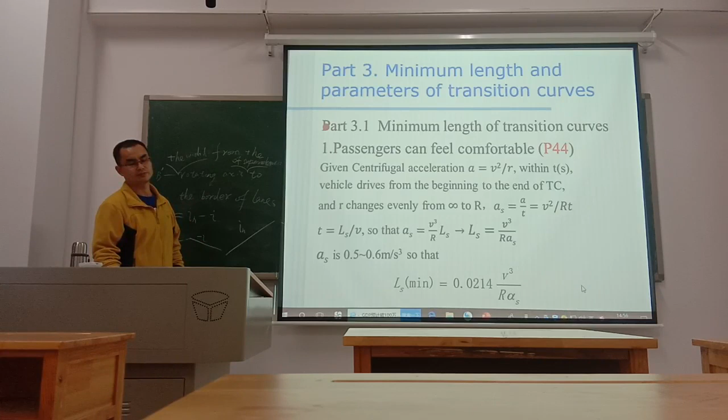In the Chinese standard, the minimum length of transition curves for highway and urban road. This is a table for highway, including freeway, and that is different from America, Europe, or Africa.

The design speed is 120 or 100. When the design speed is 120 kilometers per hour, the road is freeway.

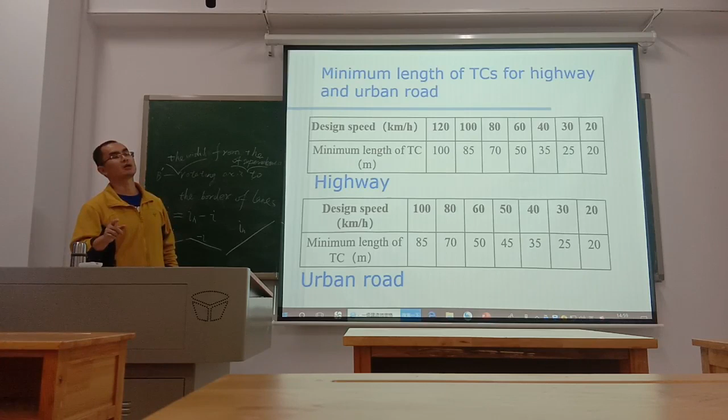On the urban road, there is a minimum length of transition curve corresponding to every design speed on urban road or on highway. The larger the design speed, the larger the minimum length of transition curve.

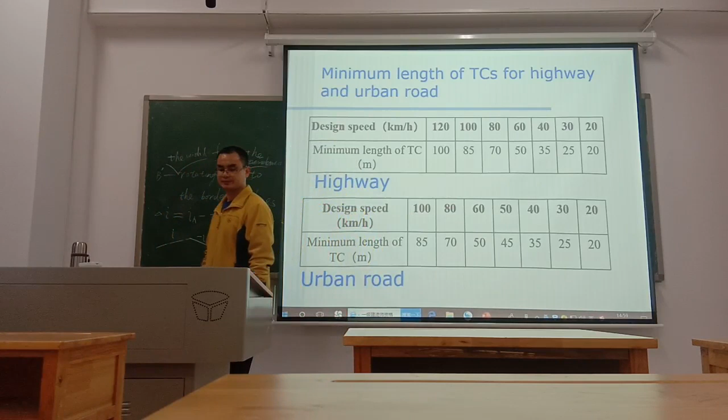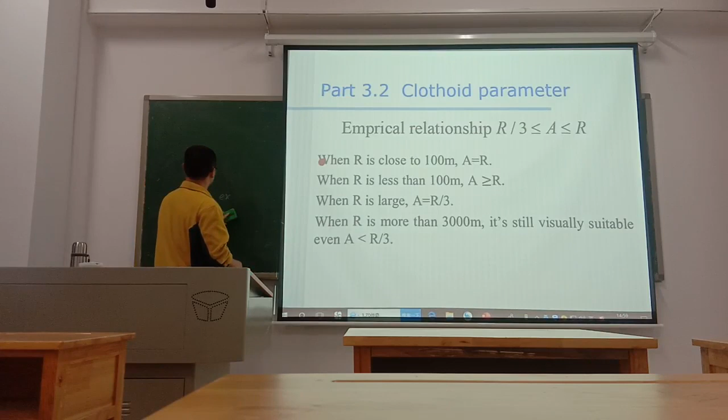What's the clothoid parameter? L times R equal to the square of A. A is clothoid parameter.

Empirical relationship is: A is greater than or equal to radius divided by 3, and less than or equal to radius. This is the empirical relationship.

When R is close to 100 meters, A is equal to R. When R is less than 100 meters, A is greater than or equal to R. When R is very large, A is equal to R divided by 3. When R is more than 3000 meters, it's still visually suitable, even if A is less than radius divided by 3.

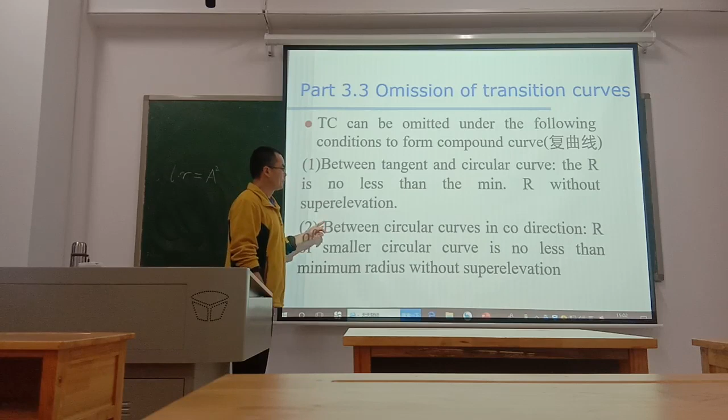2. Between circular curves in the same direction, turn left or turn right, the R of smaller circular curve is no less than minimum radius without superelevation. 3. The smaller r value is larger than the minimum r.

The last page. What's the minimum of R with superelevation? The standard has the table of minimum R with superelevation.

In this book, page... We have the book actually.

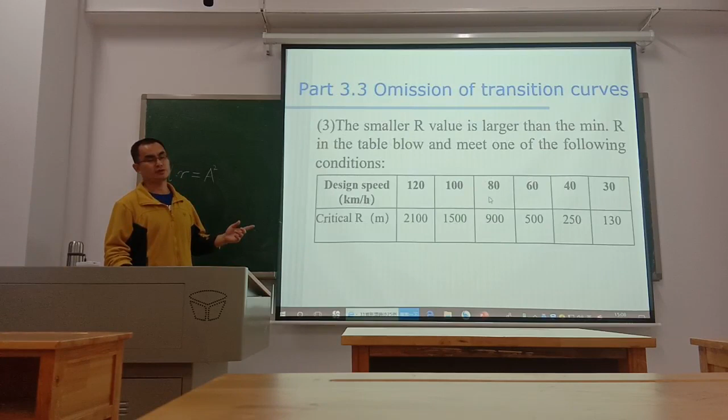And with one of the following, must meet one of the following conditions. What are the conditions? These are the three conditions. One is okay, one, two, three. If the condition meets one of the three, you can omit this table, you can omit the transition curve. Transition curve is not necessary. You can delete it.

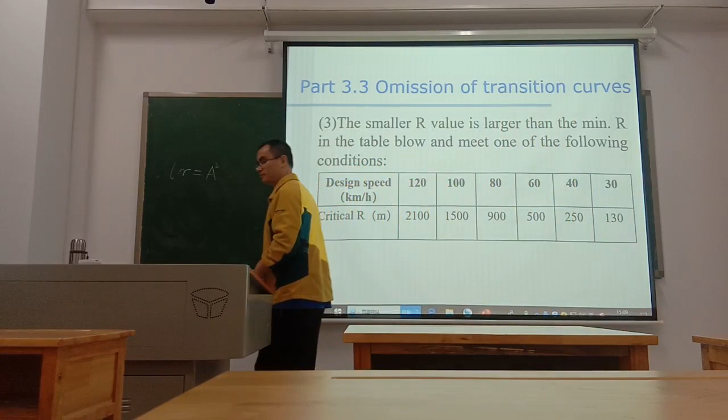If the radius is this value, if we find this value, we will not put a transition, we will omit the transition. It's greater than, it's greater, we can omit the transition curve. If it's less than this value, we must use transition curve.

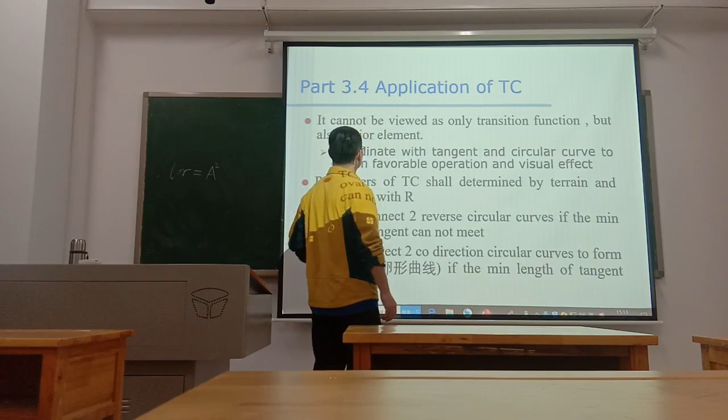The parameters of the transition curve shall be determined by terrain and coordinate with R. Transition curve can connect two reverse circular curves if the minimum length of tangent cannot meet. Transition curve can connect two co-direction circular curves to form an oval, egg shape, oval curve, if the minimum length of tangent cannot meet.

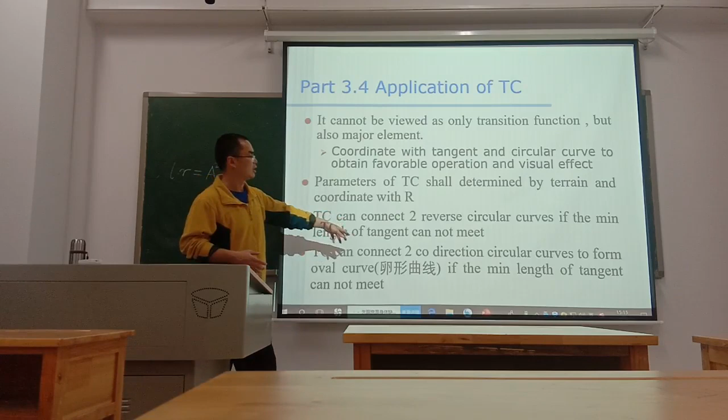What's the meaning of the minimum length of tangent cannot meet? It's too short. The tangent, or the straight line, the length of the straight line is too short. We can connect these curves with one transition curve, clothoid or one transition curve. This is the same meaning.

Transition curve with transition curve. L is the length of the total transition curves, including circular curve and two transition curves. Ls is the length of the transition curves. L is the length of circular curve. R is the radius of circular curve. Alpha is the central angle.

This formula is for the calculation of horizontal curves. Q is the increment of tangent. P is inner shift value. Beta 0 is the angle of transition curve.

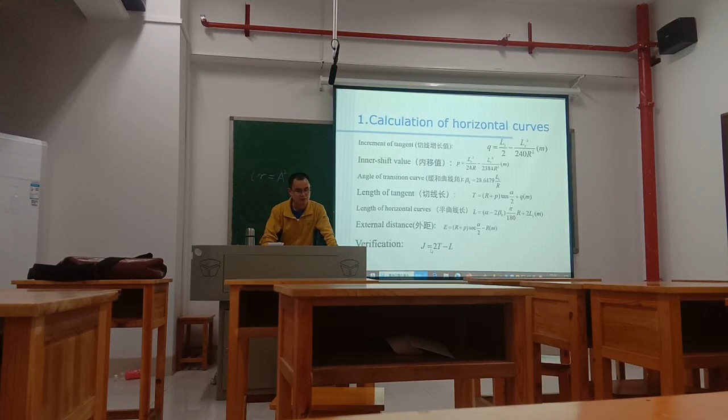Beta 0 is the angle of transition curve—this is beta 0 and this is beta 0, because this transition curve is the same as this transition curve. T is length of tangent. L is length of horizontal curves. E is external distance. Verification: J equals 2 times T minus L.

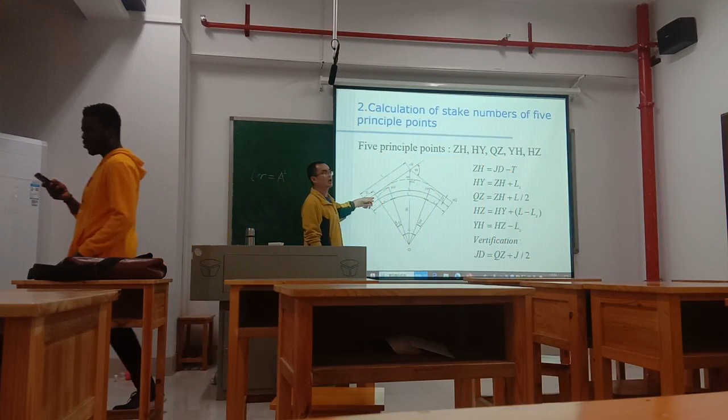We can get 5 principal points, the stations of the 5 principal points. The 5 principal points include, contain, ZH—this point is the joint, the point between the joint between straight line and a transition curve.

HY is the joint, the point of the transition curve and circular curve. YH is the joint between circular curve and transition curve. HZ is the joint between transition curve and straight line. QZ is the middle point of circular curve. So we can get the distance of these two points—this is the calculation formula.

Calculation of stake numbers of 5 principal points.

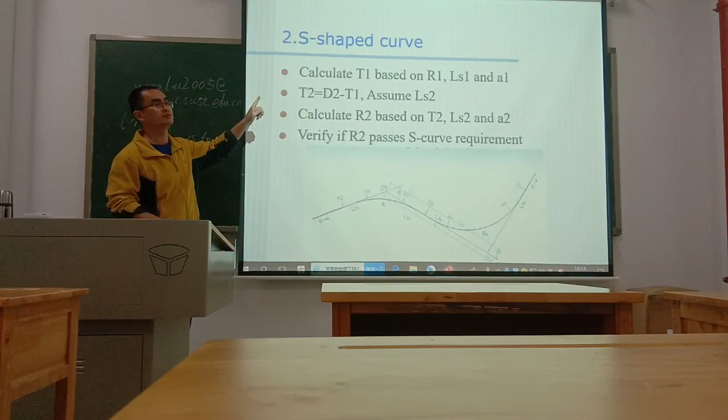3. Oval curve. You can study this method according to this picture. How to calculate this S-shaped curve? Oval curve. Oval curve is the one that connects 2 circular curves by closed soil.

Circular curve 1, clothoid, circular curve 2. This circular curve has the same turning direction as circular curve 2, and the radius R1 is different from R2, R1 is not equal to R2. This is circular curve 1, circular curve 2, and this is clothoid. So this is called oval curve.

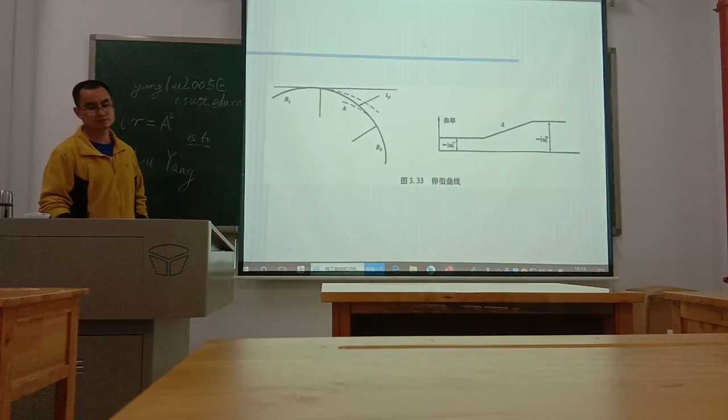Oval curve is often used on ramps for interchanges. Circular curve 1, circular curve 2.

Clothoid parameter A in oval curve should satisfy the condition of this expression. Ratio of R of 2 circular curves should be between 0.2 and 0.8. D divided by R2 should be equal to between 0.003 and 0.03. D is the gap between 2 circular curves.

R2 is the R of the smaller circular curve. So R2 is the smaller circular curve radius. In this picture, what's R2? This one is smaller than the other one. The radius of this one is smaller than the other one.

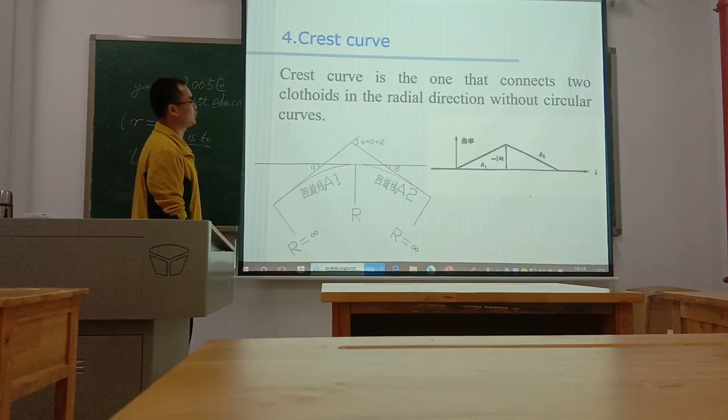Four, crest curve. Crest curve is the one that connects 2 clothoids in the radial direction without circular curves. The length of the circular curve is 0.

Straight line, clothoid 1, clothoid 2, straight line 2. Straight line 2, straight line 1, straight line.

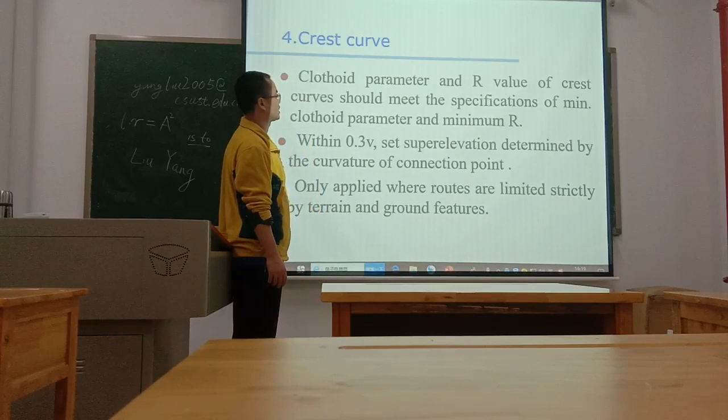Clothoid parameter and R value of crest curves should meet the specification of minimum clothoid parameter and minimum R within 0.3 times V, with superelevation determined by the curvature of the connection point. Only applied where routes are limited strictly by terrain and ground features.

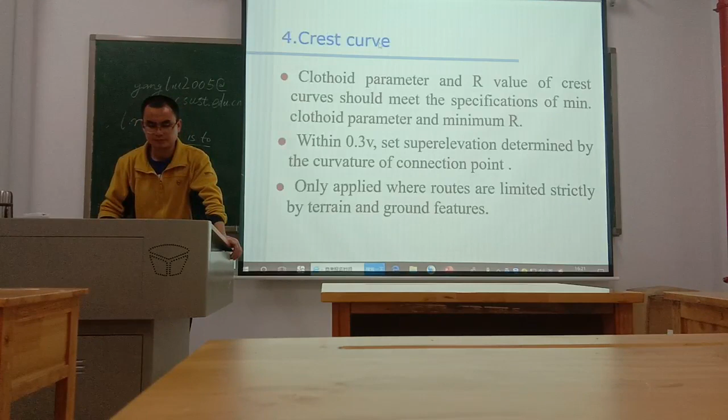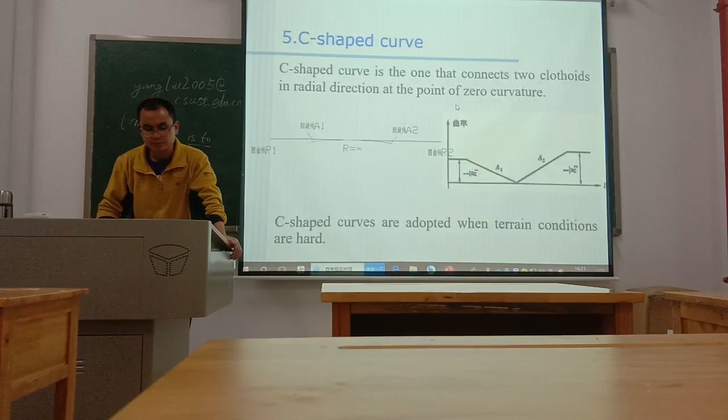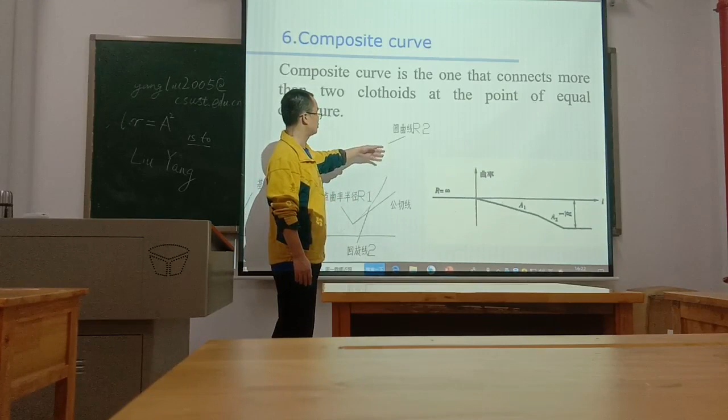Six, composite curve. Composite curve is the one that connects more than two clothoids at the point of equal curvature. This is straight line. This is clothoid 1. This is clothoid 2. This is circular 1, circular 2.

Parameter ratio of adjacent clothoids should be less than 1:1.5, because the curvature is changing constantly, which leads to manual continuous steering that is adverse to the driver. Application conditions: when routes are limited by terrain, except interchange.

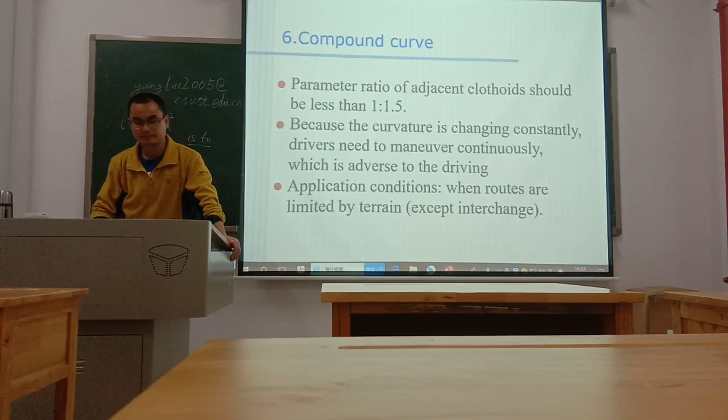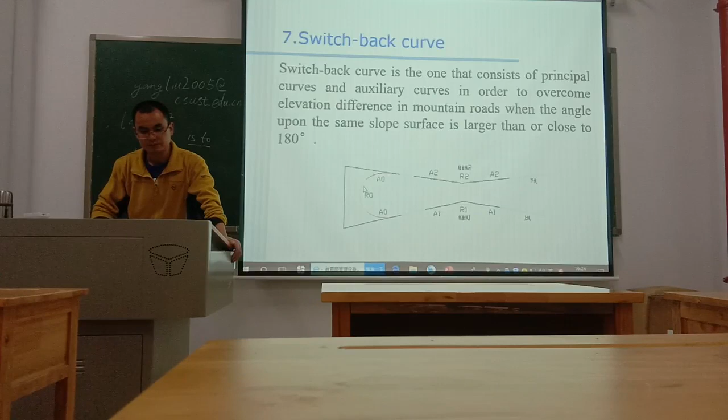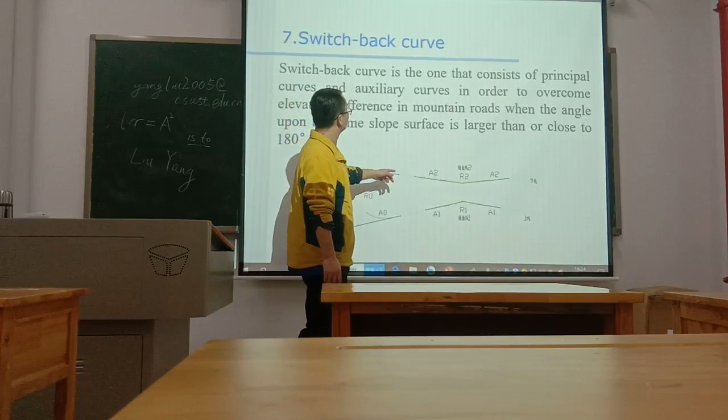This is the major circular curve, this is the principal circular curve. And these two are auxiliary circular curves. This is closed straight line, closed straight line.

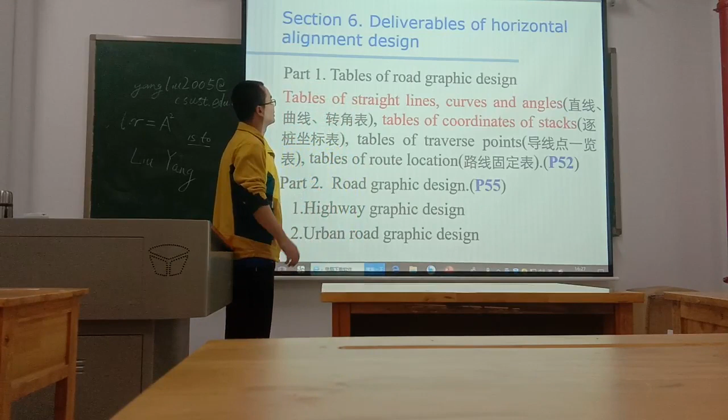Deliverables of horizontal alignment design. Part 1: Tables of road graphic design. Tables of straight lines, curves, and angles. Tables of coordinates of stacks. Tables of traverse points. Tables of route location.

Road graphic design: highway graphic design, urban road graphic design. You can study this graphic design in the textbook. That's the work for chapter 2, horizontal alignment design.

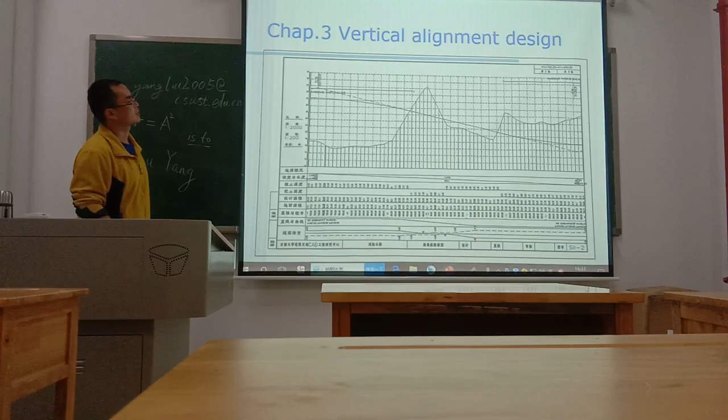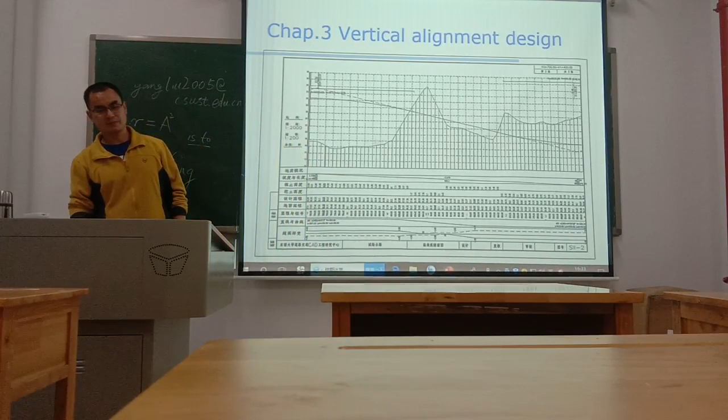This is the design line. This is the ground line. This is the design line. This is the ground line.

Section 1, introduction. Section 2, grade design. Section 3, vertical curve. Section 4, combination of horizontal and vertical alignment. Section 5, design method and drawing of vertical alignment.

Section 1, introduction. Ground line. What's ground? Ground line is an irregular broken line plotted according to the elevation of every point in the road midline. Ground line reflects the changing condition of a regional road line or road midline. Ground line is determined after the layout of horizontal alignment.

It is determined when the horizontal alignment is chosen.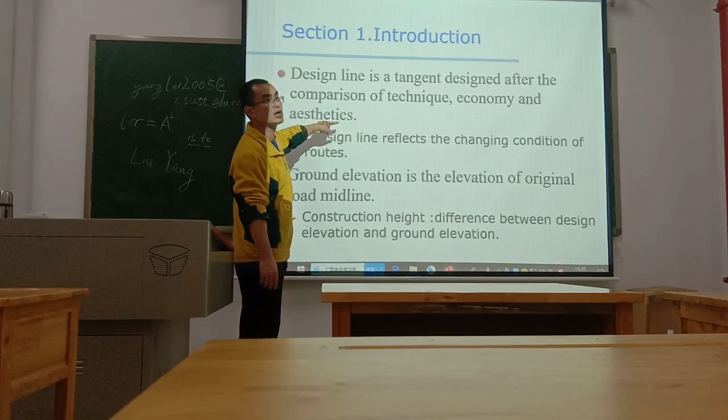Design line is a tangent design after the comparison of technique, economy, and aesthetics. Three aspects: technique, economy, aesthetics. Aesthetics is important.

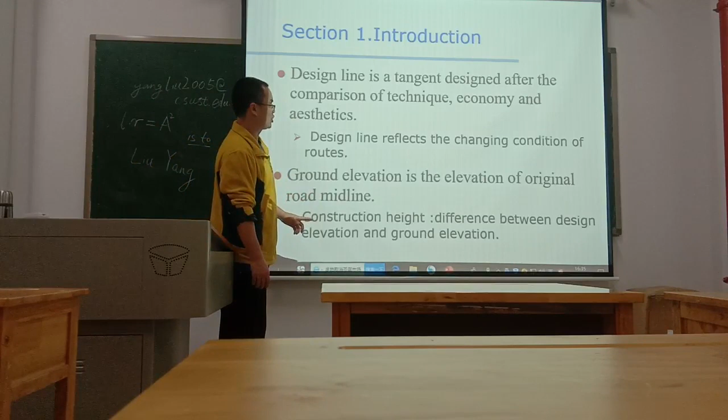Design line reflects the changing condition of routes. Ground elevation is the elevation of original road midline. Construction height is the difference between design elevation and the ground elevation.

Uniform grade line. Uphill and downhill. Grade, I is grade. Grade is equal to the difference of height divided by the horizontal length. Grade changing point.

What's grade changing point? It is the turning point of different grades. Grade changing point is the turning point of different grades.

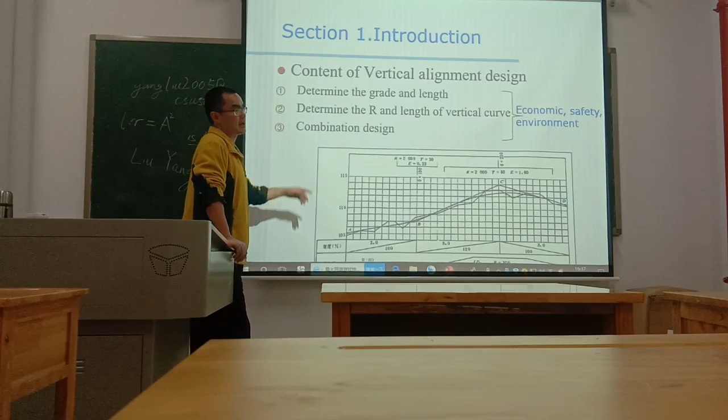Content of vertical alignment design: 1. Determine the grade and the length. 2. Determine the R and the length of vertical curve. 3. Combination design of horizontal and vertical alignment.

We must guarantee that the road design is economic, safe, and environmentally friendly.

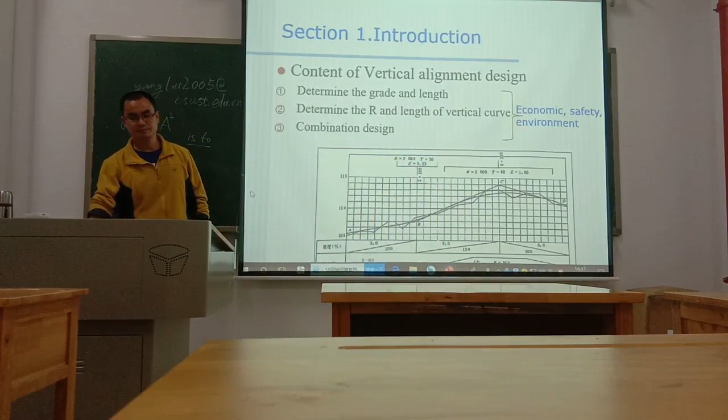Design elevation. Subgrade design elevation of newly built highways.

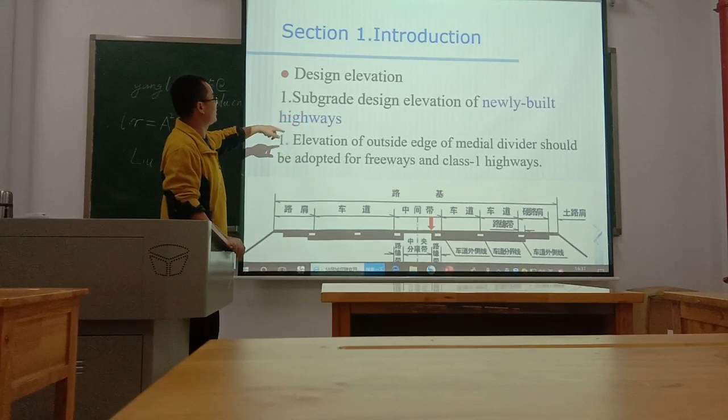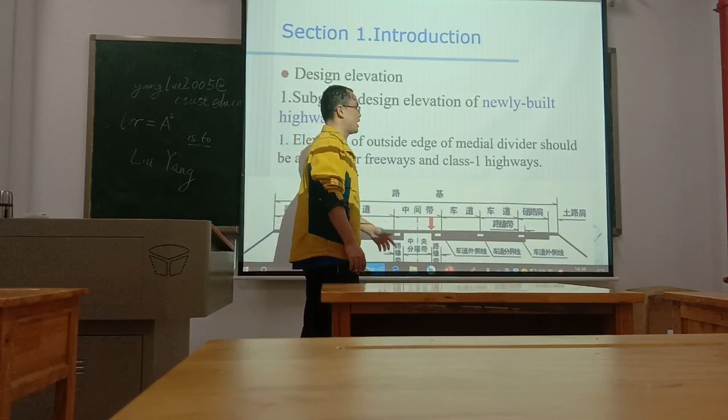1. Elevation of outside edge of medial divider should be adopted for freeways and class 1 highways. 2. Elevation of subgrade edge can be used as design elevation for class 2, 3, 4 highways.

3. The original elevation of edge should be adopted in sections with super elevation or broadening. 4. Elevation of reconstructed highways should be treated as newly built highways.

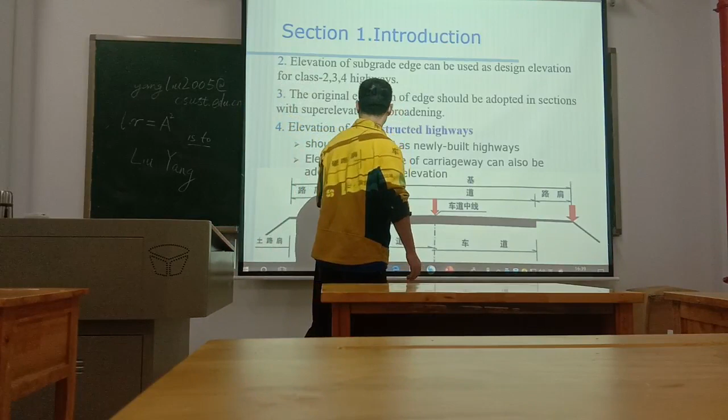Elevation of midline of carriageway can also be adopted as design elevation.

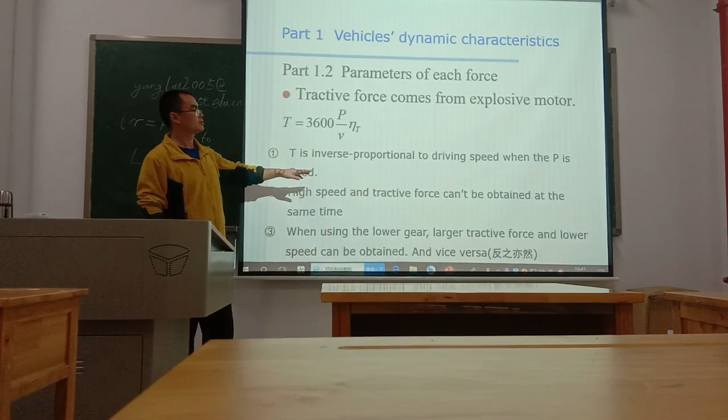High speed and tractive force cannot be attained at the same time. If high speed, then no tractive force; if no speed, then high tractive force.

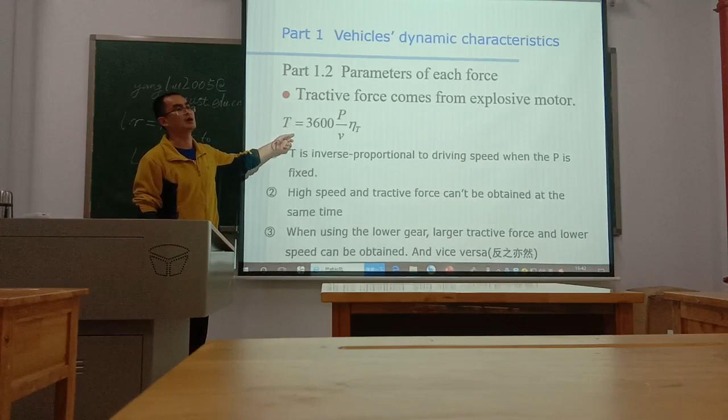Reverse ratio. When using the lower gear, a larger tractive force and lower speed can be obtained, and vice versa.

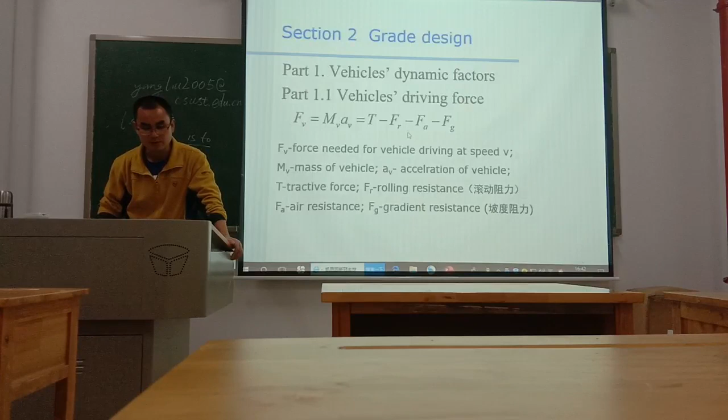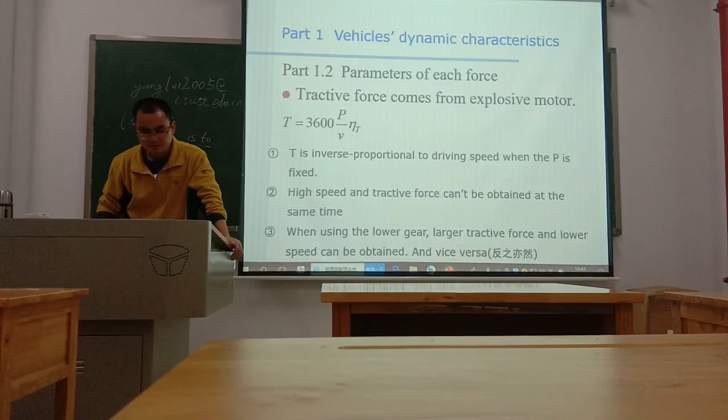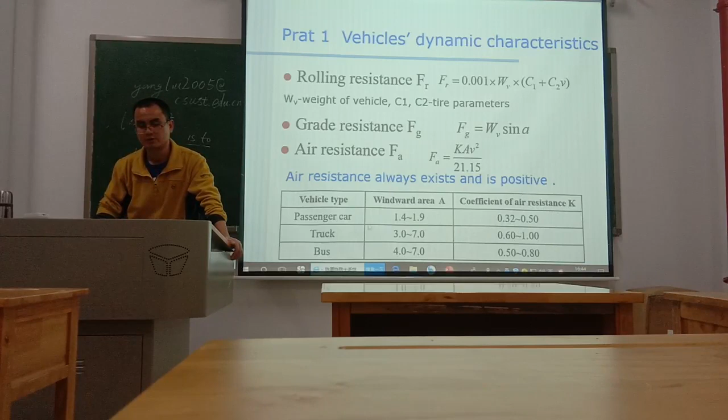For trucks and buses, the windward area is larger than for passenger cars. K is the coefficient of air resistance. The coefficient of air resistance of trucks and buses is larger than that of passenger cars.

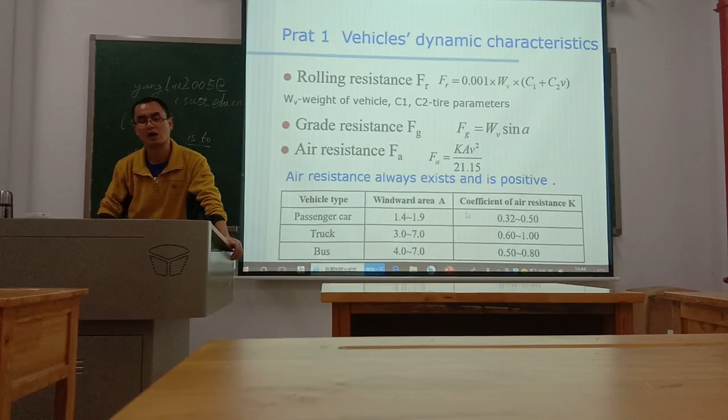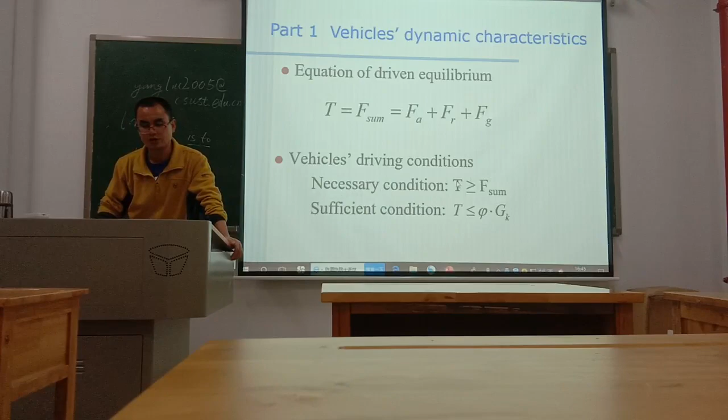Equation of driving equilibrium. Vehicle driving conditions, the necessary condition: T is greater than or equal to Fsum; sufficient condition: T is less than or equal to, phi multiplied by Gk.

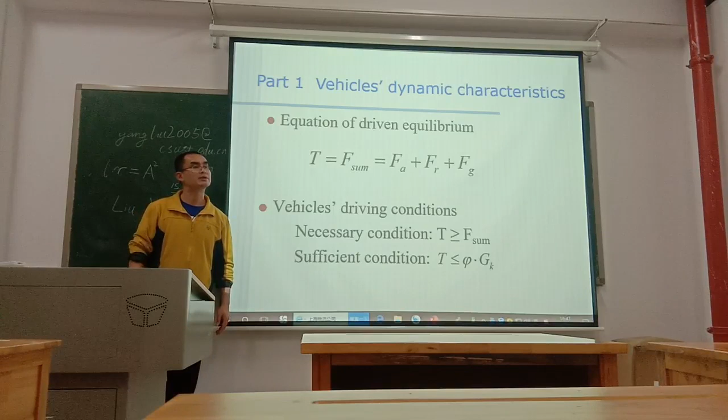What's the meaning of this sign? Phi is the adhesive coefficient between the tire and the pavement, or friction coefficient between the tires and the pavement. Adhesive coefficient between tire and pavement.

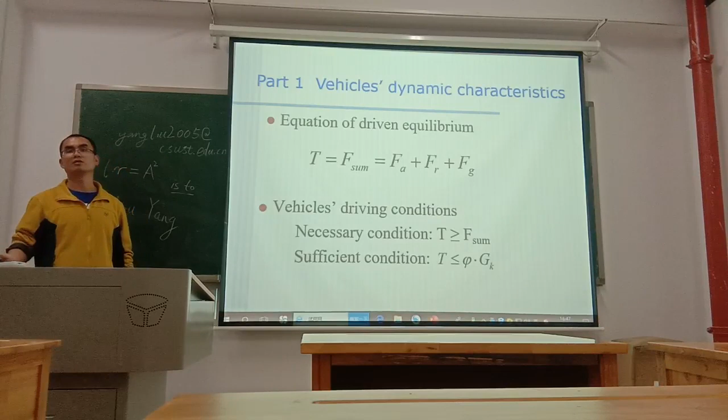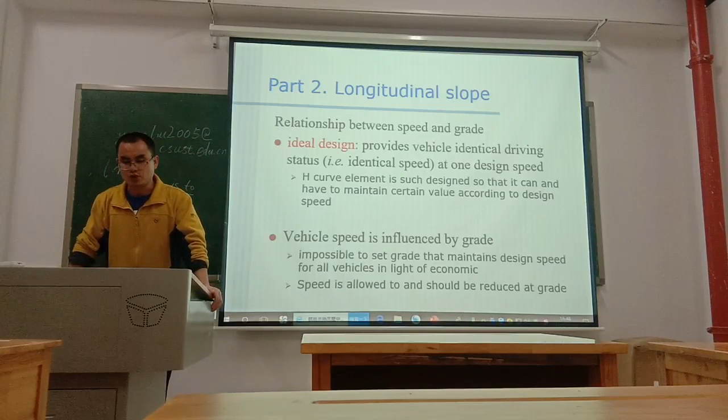Part 2, longitudinal slope. Relationship between speed and grade. Ideal.

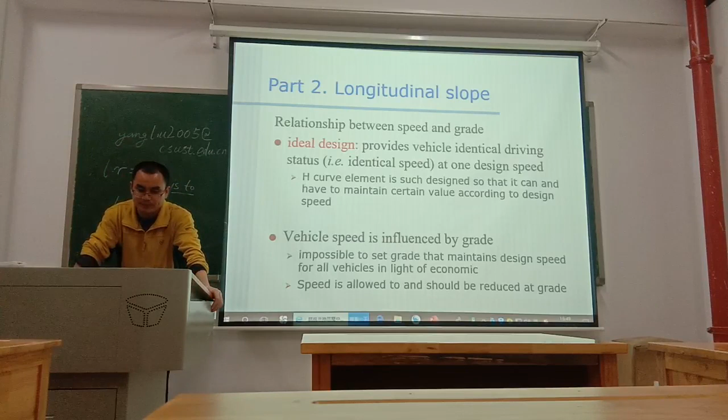Ideal design provides vehicles with identical driving status, such as identical speed at one design speed. H curve element is designed so that it can and must maintain certain values according to the design speed.

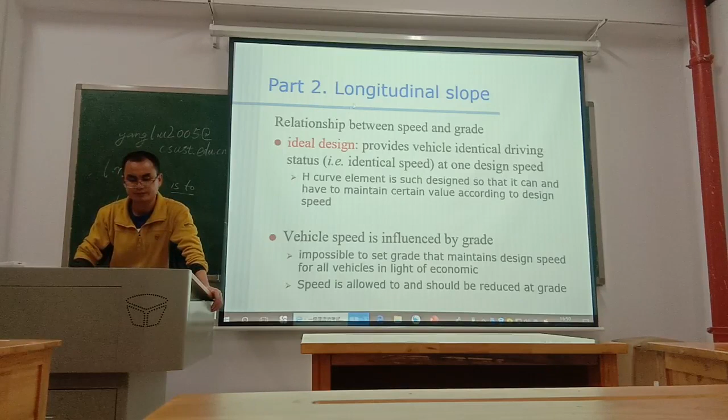Vehicle speed is influenced by grade. It's impossible to set a grade that maintains design speed for a vehicle in light of economy, so speed is allowed to and should be reduced at grade. How much can the speed be reduced? Too much speed reduction - what's the side effect?

What's the side effect of too much speed reduction? What's the impact? How to understand this - in light of efficiency, we reduce speed, but what is the side effect, what's the impact?

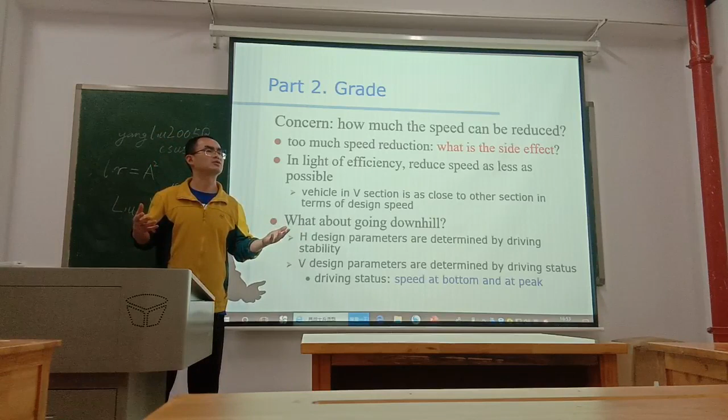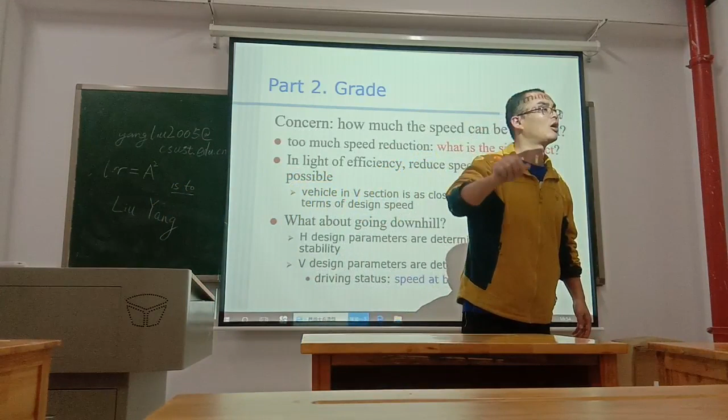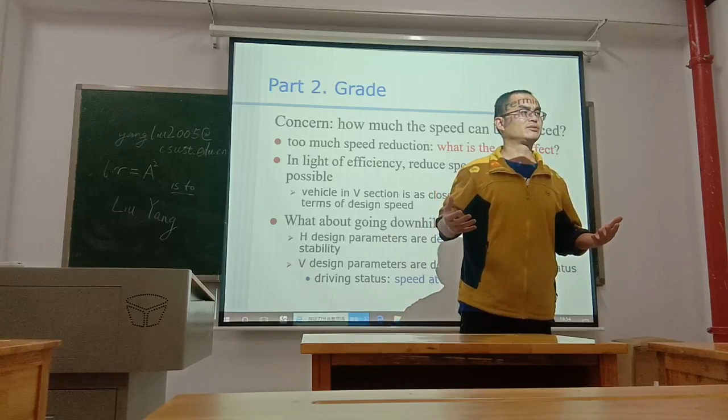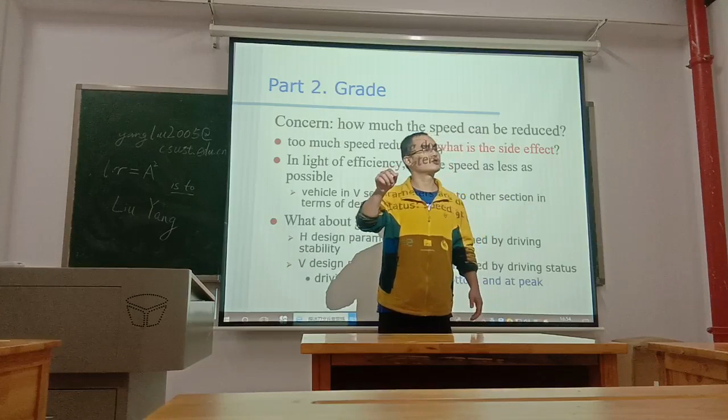If the design speed of the road is 100 kilometers per hour, but the heavy truck only runs at 60 kilometers per hour on the upgrade, what's the impact? It will block all of the vehicles behind it. So it causes traffic congestion - it will cause traffic jams.

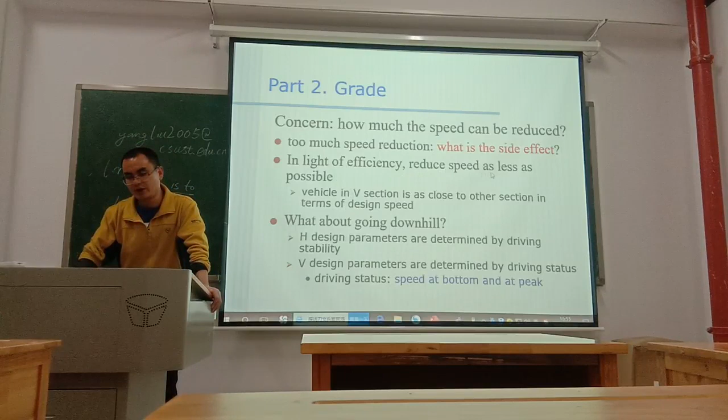One vehicle will run slowly behind it. In light of efficiency, we reduce speed as little as possible, so the vehicle in this section stays as close as possible to other sections in terms of design speed.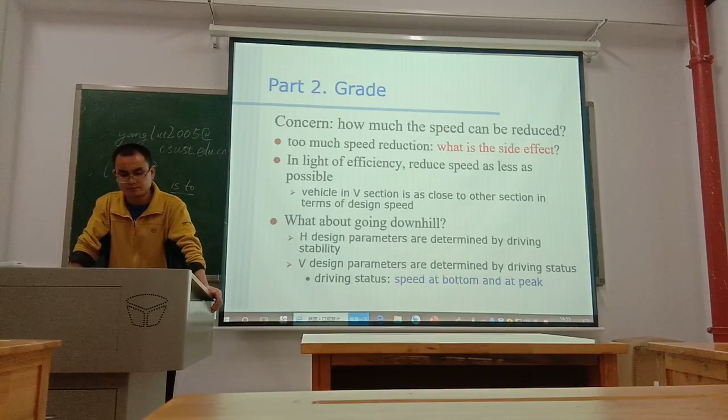What about going downhill? Oh, it's reduced speed too. It's good for avoiding congestion, but the vehicle behind it may collide with the vehicle in front of it going downhill.

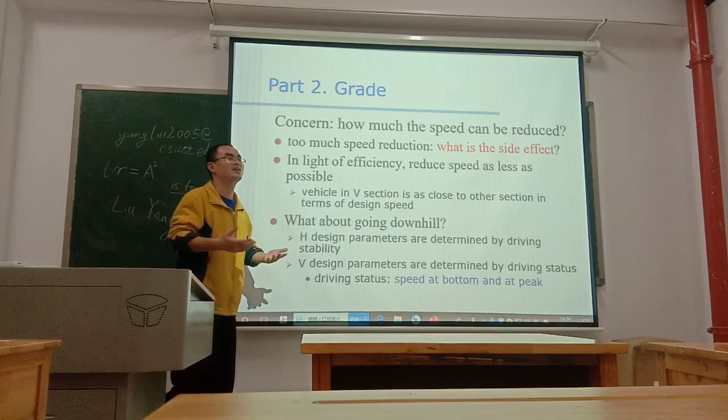For better control of the vehicle, H design parameters are determined by driving stability. H design means horizontal design - horizontal design parameters are determined by driving stability.

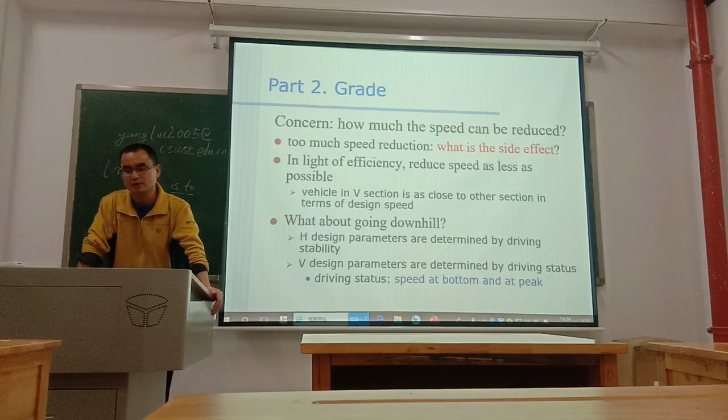We design vertical design parameters, which are determined by driving status. Driving status refers to speed at the bottom and at the peak.

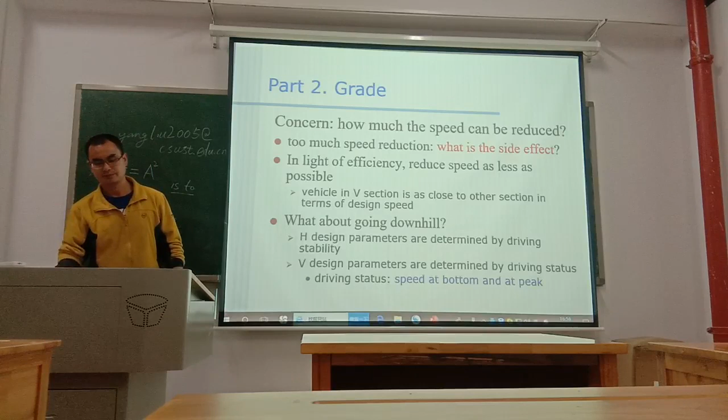Okay, 4 minutes now. Section 2.1, maximum grade. Don't be hurried, sure, we've got the PPT. The ability to climb up and the safety to go down determine the maximum grade.

It's not determined by the car, it's determined by the truck, especially the heavy truck - because the performance of the car is better, more better than the performance of the heavy truck. So we must pay attention to the heavy truck, not the car.

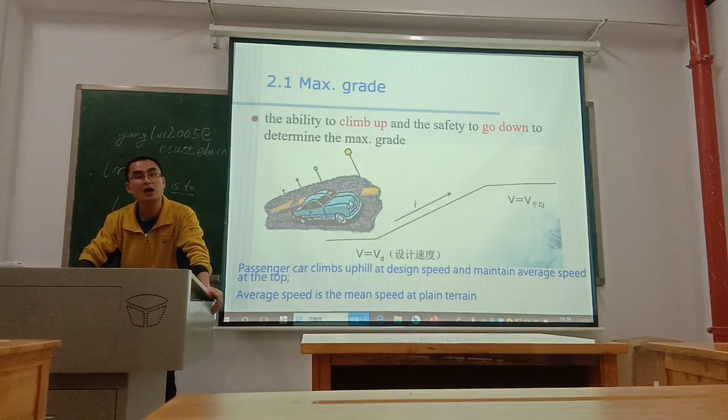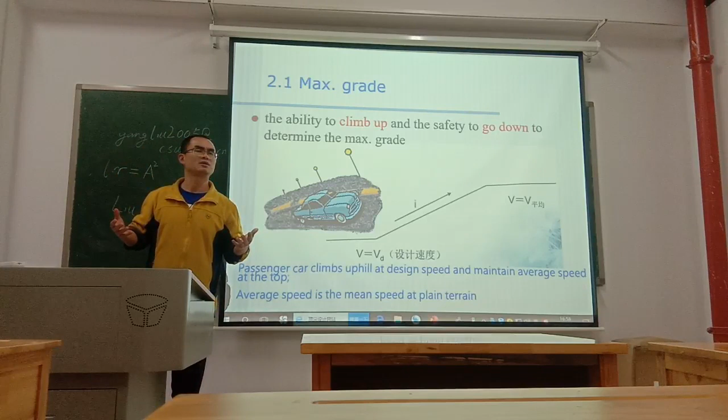The passenger car climbs uphill at design speed and maintains average speed at the top. Average speed is the mean speed at plain terrain. This is the truck, this is the car - so the car has no problem climbing the normal slope, including steep slope. No problem.

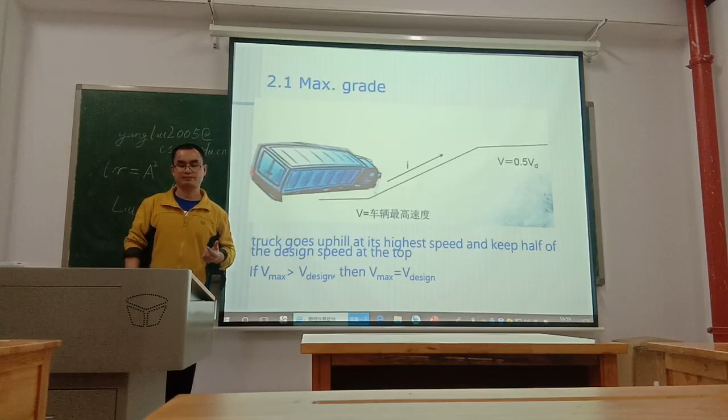But trucks go uphill at their highest speed and only keep half of the design speed at the top of the slope. This is the low demand - the speed limit at the top, keeping half of the design speed, is the condition for road grade design. The truck must keep half of the design speed at the top. If Vmax is greater than V design, then Vmax is set equal to V design.